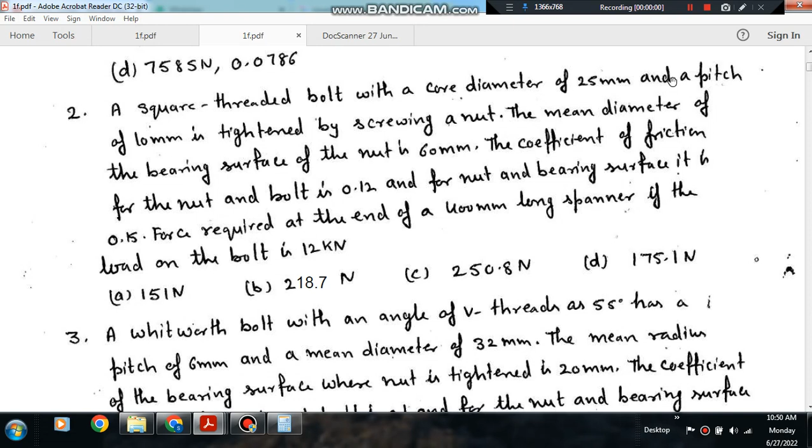Topic is friction in screw, bearing and clutches. Question number 2: a square threaded bolt with a core diameter of 25 mm and a pitch of 10 mm is tightened by screwing a nut. The mean diameter of the bearing surface of the nut is 60 mm.

The coefficient of friction for the nut and bolt is 0.12, and for the nut and bearing surface it is 0.15. Find the force required at the end of a 400 mm long spanner if the load on the bolt is 12 kilonewton. Option A 151 Newton, option B 218.7 Newton, option C 250.8 Newton, option D 175.1 Newton.

So this is your square threaded bolt. This is your D mean diameter, and this portion is square. That's why it is called square threaded bolt. The distance between corresponding points on the thread is pitch, so this will be pitch by 2. So outer diameter will be d core plus p by 2 plus p by 2, and mean diameter will be the average, that is d core plus p by 2. So in this case the mean diameter is 30 mm.

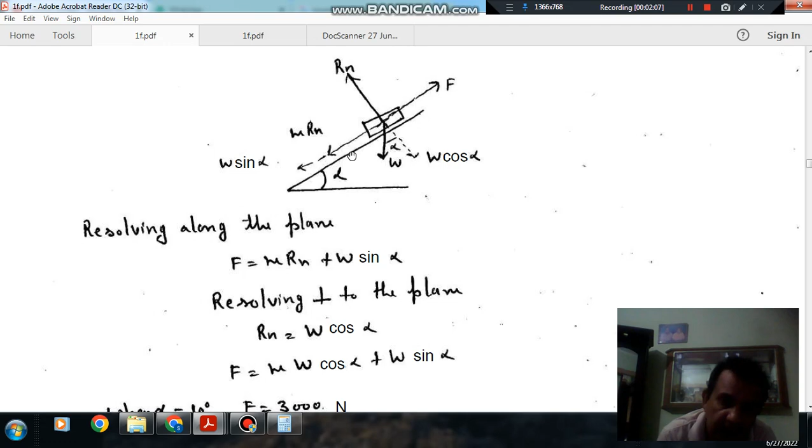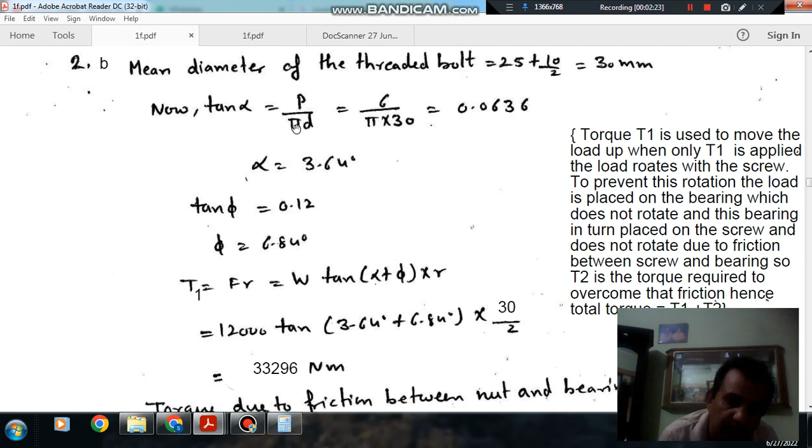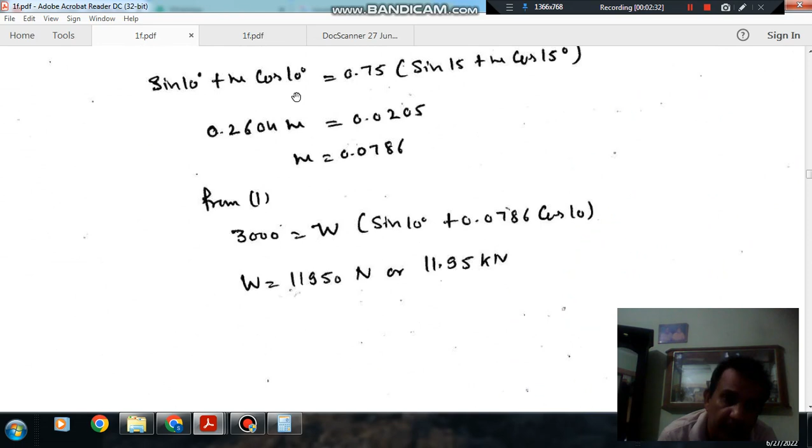Lifting with the screw can be compared with an inclined plane. In one rotation, the screw will move horizontally by a distance pi d and will move up by a distance of pitch. So P by pi d represents tangent alpha; in a screw threaded bolt it is called helix angle, and in an inclined plane it is called inclined plane angle. These are almost the same.

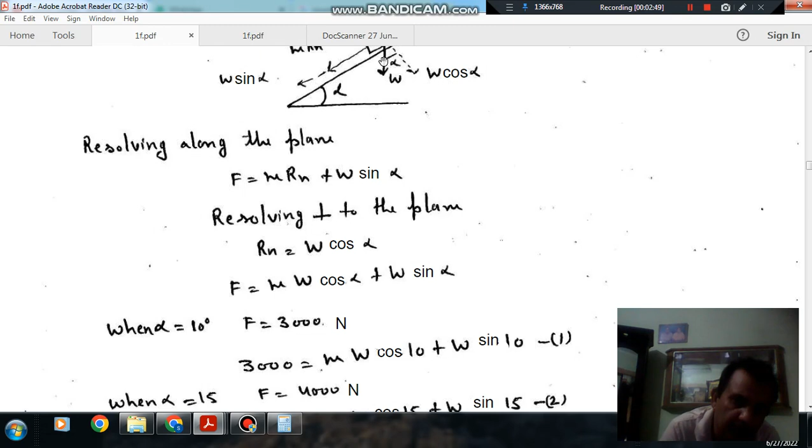So the horizontal distance is pi d, and p is your vertical distance. Tangent alpha is pitch by pi d. Pitch is 6 and diameter is 30, so tangent alpha is 0.0636 and alpha is 3.64 degrees. So helix angle is 3.64 degrees. Now we have determined the helix angle.

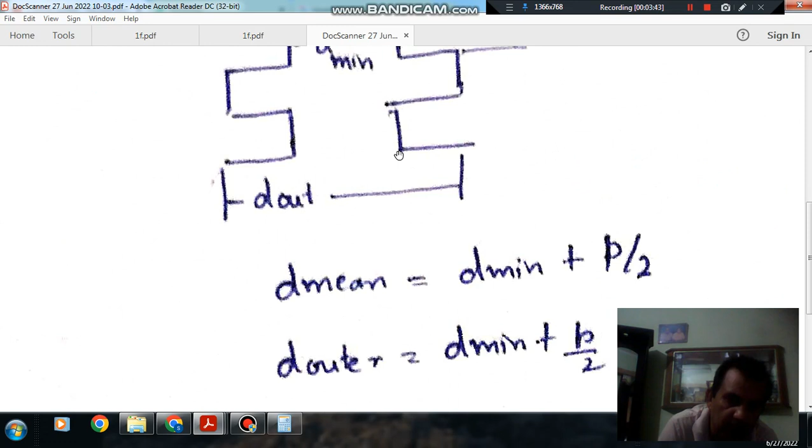The friction between nut and bolt is 0.12, so tangent phi is equal to 0.12, and the friction angle is 6.84 degrees. Now if we apply a force at the circumference of the mean diameter to rotate the screw or lift the nut, this force is given by F is equal to W tangent of alpha plus phi. Alpha is 3.64 degrees, phi we have calculated, and W is 12,000 Newton. That is the force required at the circumference of the mean diameter.

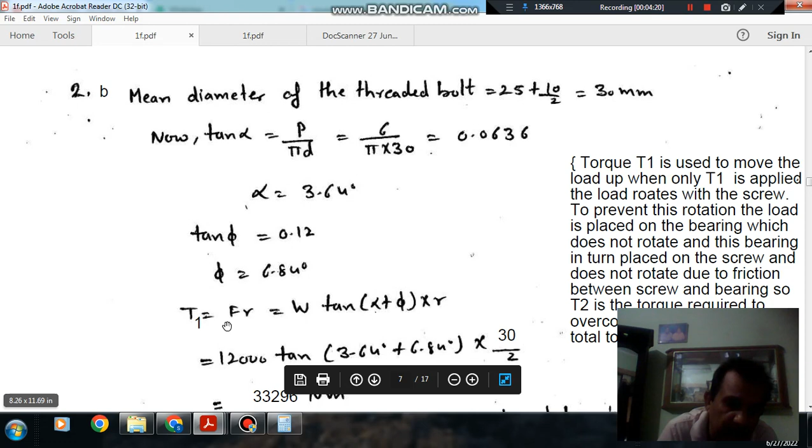If we multiply it by R, then it will be the torque required to lift the load, which comes out as 33296 Newton mm. This is the torque required when lifting of the weight is carried out with the rotation of the weight. Torque T1 is used to move the load up; when only T1 is applied, the load rotates with the screw.

To prevent this rotation, the load is placed on a bearing that does not rotate with the screw, and then its rotation can be prevented. But then there will be friction between the screw and bearing. The load is placed on the bearing and the bearing is placed on the screw, and it does not rotate due to friction between the screw and bearing.

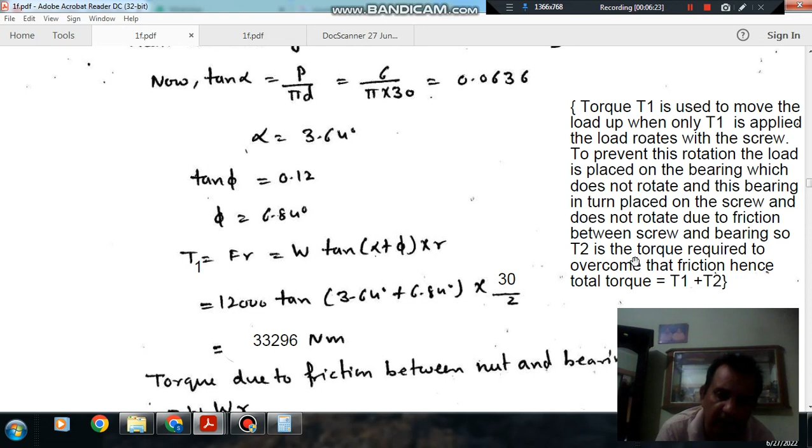To prevent its rotation, some torque is used to overcome the friction, or wasted in friction. That torque is T2, and we should also take it into account, because T1 is required when lifting the weight with rotation of the load. Here no rotation of the load is required, so a bearing is placed in between, and there will be some torque lost between bearing and screw, as the coefficient of friction between them is 0.15.

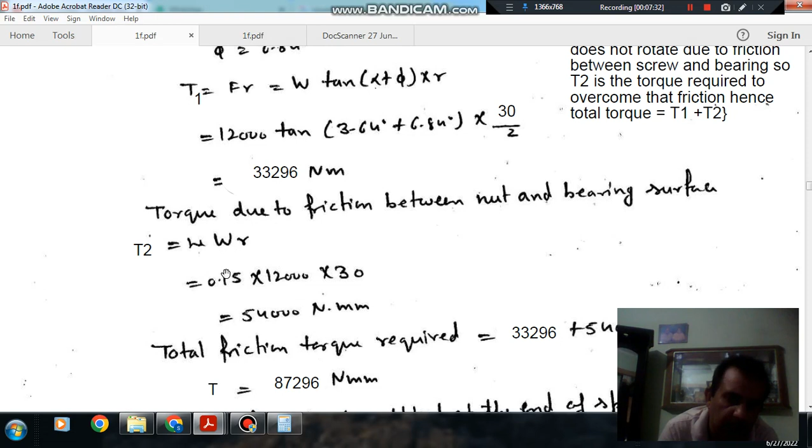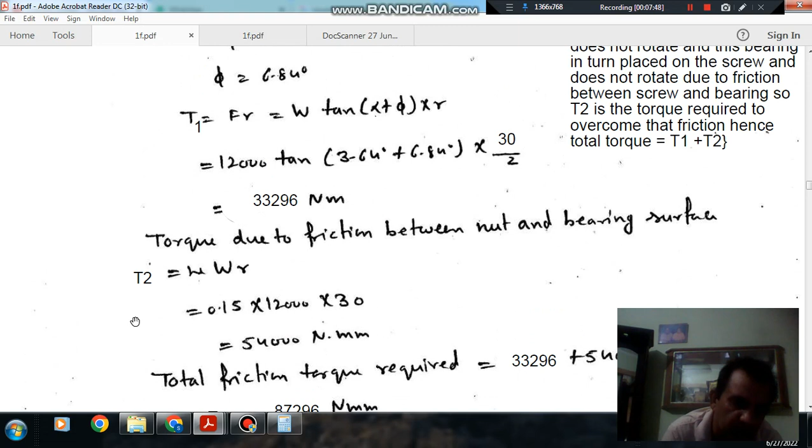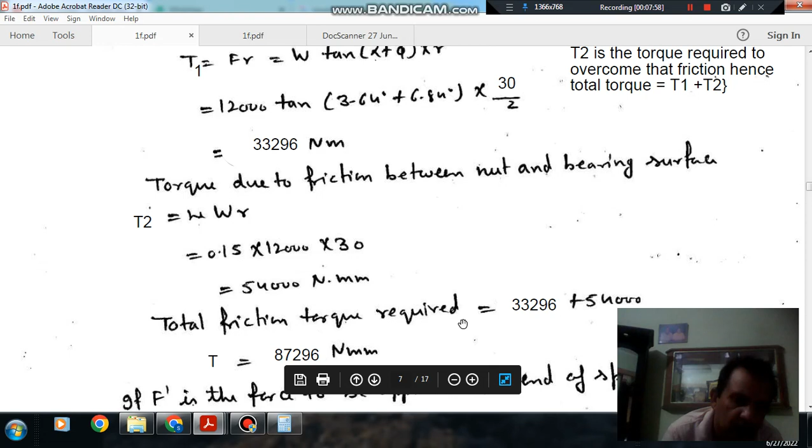The mean radius of the bearing is 30, diameter is 60 mm. The torque consumed in overcoming that friction is mu W R, where W is the load on the bearing. So that will be 0.15 into 12,000 into 30, so T2 is equal to 54,000 Newton mm. The total torque required is T1 plus T2, because one is for lifting and the other is to prevent rotation. So total torque required is 87296 Newton mm.

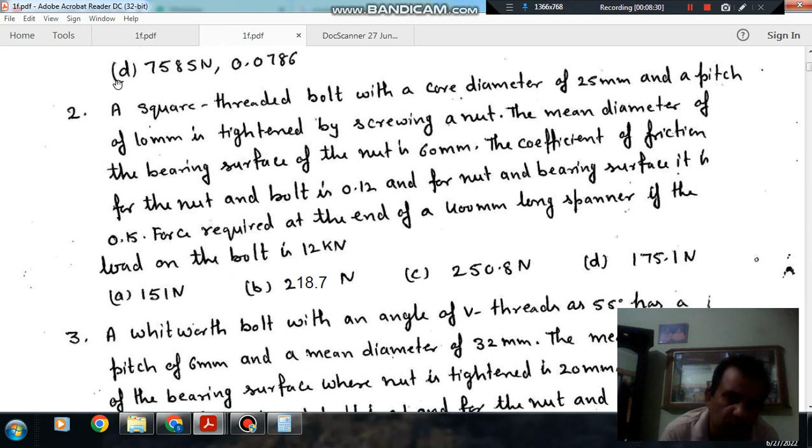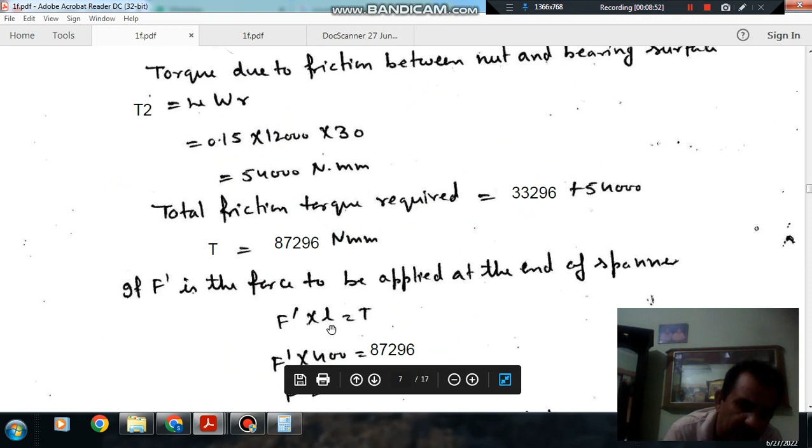In the first case the load is applied here, and in the second case, with bearing radius 30, the load is applied here, and we calculated the torque correspondingly. Now a spanner of 400 mm length is attached. We have to apply a force F dash at the end of the spanner so that F dash times L creates the same torque. L is 400, so F dash is 218.7 Newton. So that is the answer to question number 2.